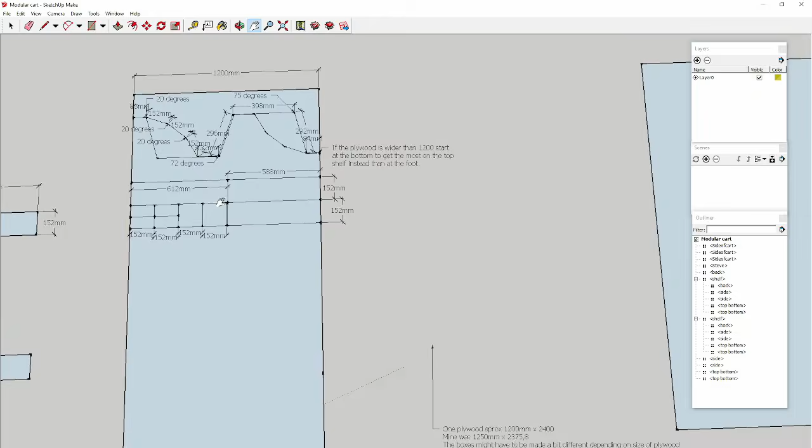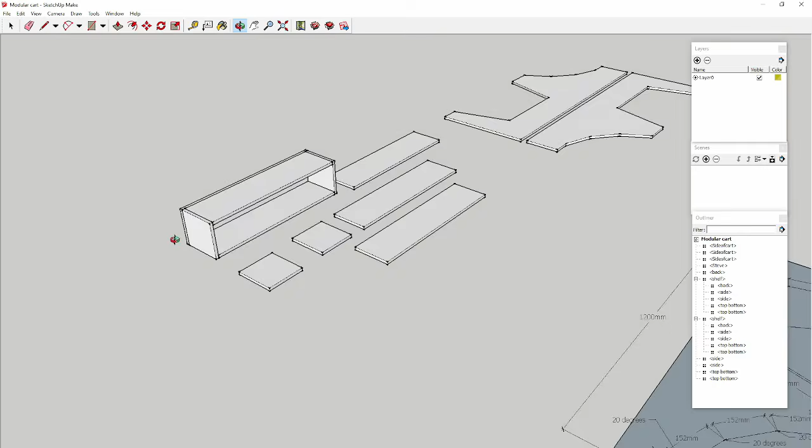So if we zoom out here, we can look at the box over here. This is what the box will look like in the end. You see that you add the top and bottom ones on the inside of the side panels, and then the back panel over all these sides. And you can either screw or nail them together.

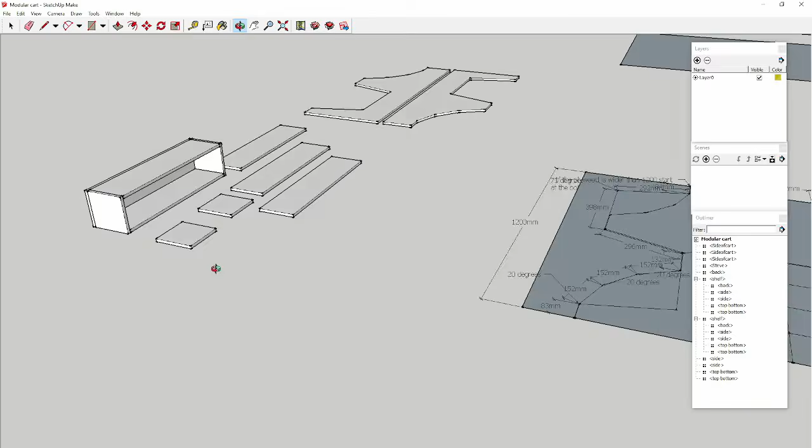I used a nail gun and glue, just these small nails just to keep it in place while the glue dried, and to give it some rigidity over time, I guess. So for each box, you will need 1 back panel, 2 top and bottom panels, and 2 side panels.

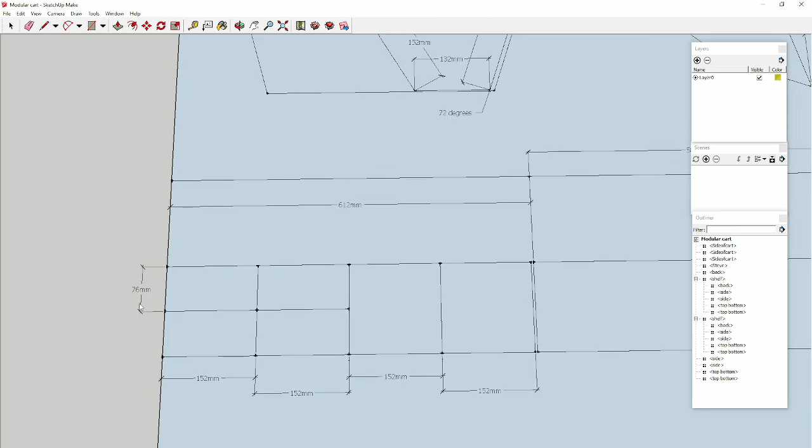And as I said, in my original design, I did the side panels 152 times 152. I'd say keep one of those to put the power supply and stuff like that in, and then maybe really bulky modules on the back, and then you can actually just split them in 2. So that would be, didn't add that, 76 millimeters wide if you want smaller panels.

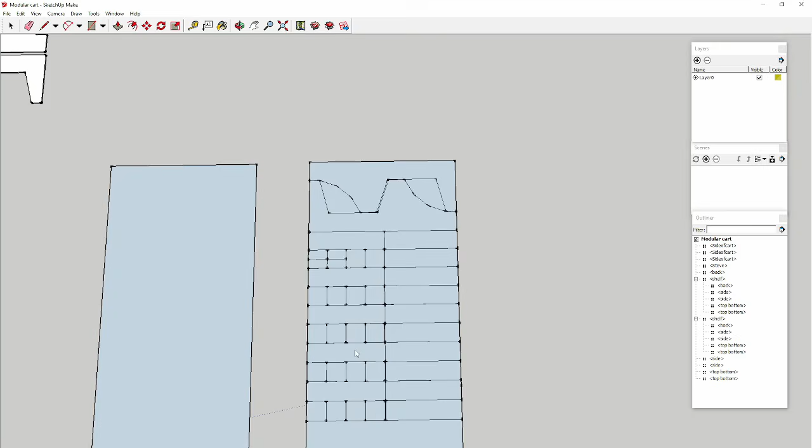And if we look at how a plywood sheet would look then, I'll come back to the sides of the cart up here, and then you would just add as many shelves as you'd like. Here you have 1, 2, 3, 4, 5 shelves, and way too many side panels, depending on if you do half size. So here you have 1, 2, 3, 4, 5, and then you wouldn't need these 3. You could actually make one more with the spare you have down here, so you could get 6 shelves if you wanted to.

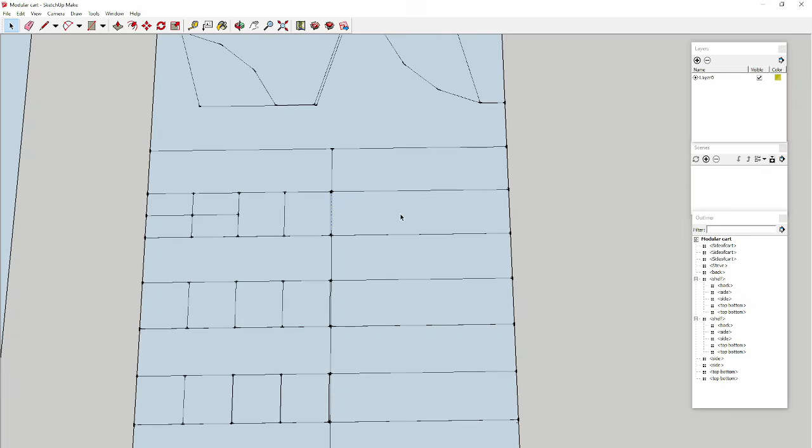Important to note that there will be one small piece of unused material in here in the middle, because it doesn't line up that way, because this one is 612 and these are 152 each. But it's all in the dimensions here. I will have a better PDF of how this looks, so you can look at that.

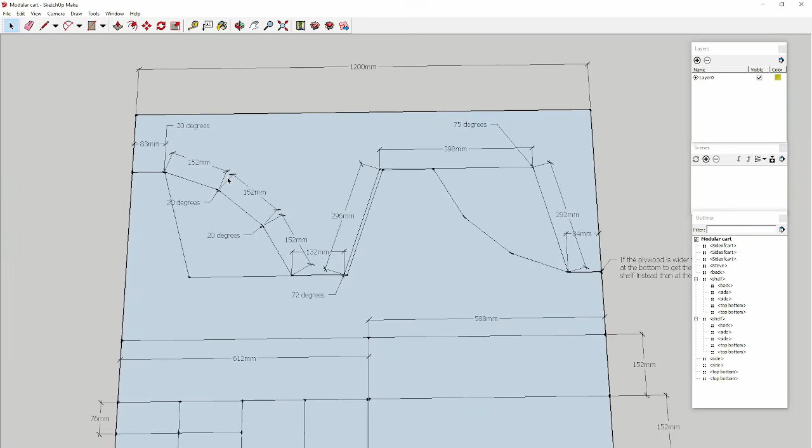So the sides of the cart are, I guess, a little bit more complicated. By placing them like this, they take the least amount of material, so you can get as many shelves as possible. The one downside that you should look out for is that one side's outside of the cart will be the back side of this board, and one will be the front side. So if you have one side that is a little bit nicer than the other one, then you might get one side that is a little bit messy.

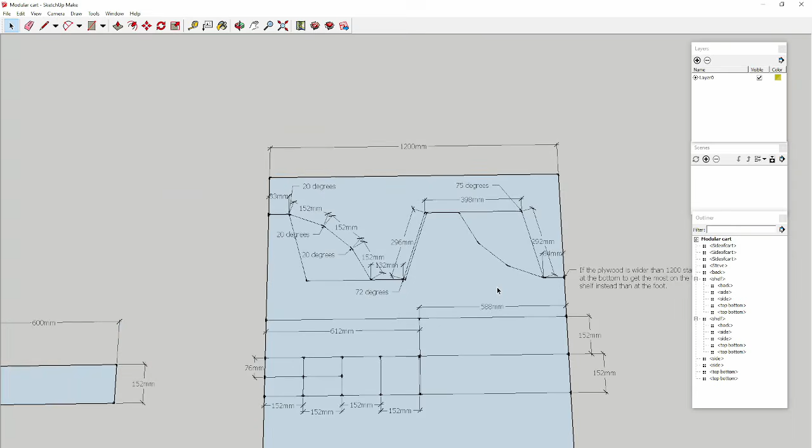So depending on the width of this board, then it's this down here. If the plywood is wider than 1200, start at the bottom to get the most on the top shelf instead of on the foot. So you take away from the foot down here, if you look at this piece here, so you get as much material as possible up here.

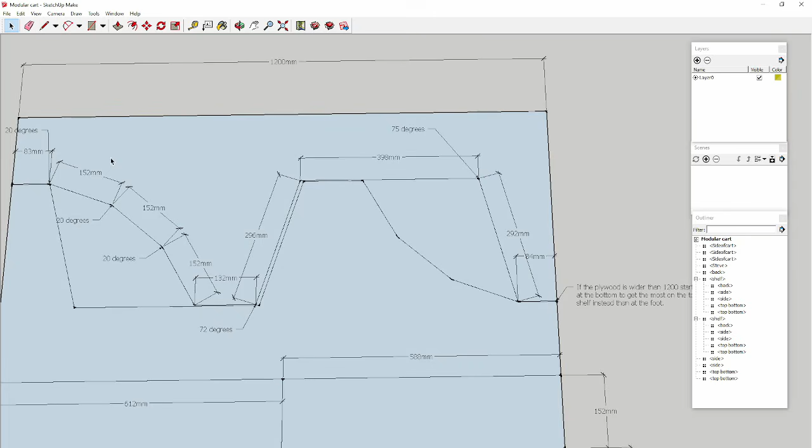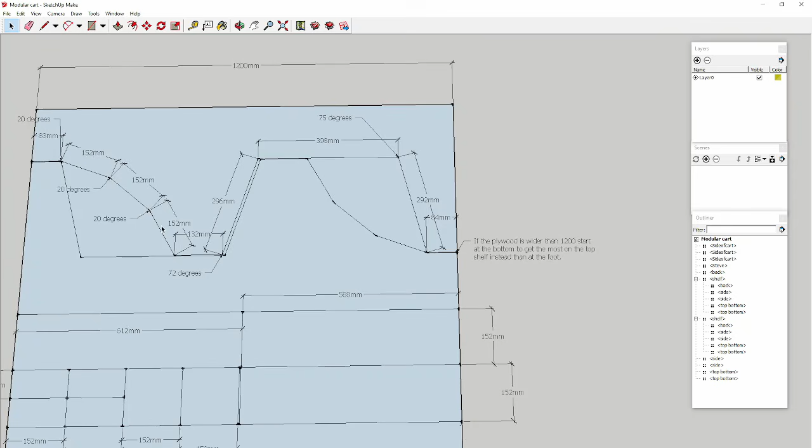But basically, you follow this along: this is 75 degrees here, it is 72 degrees there, and then you don't need to figure that one out. And then 132 millimeters here, and then it's just sections of 152 millimeters here with 20 degrees in between, and I found 20 degrees was a really nice angle to get a nice curve. And you can see how the sides of the cart will come out like this.

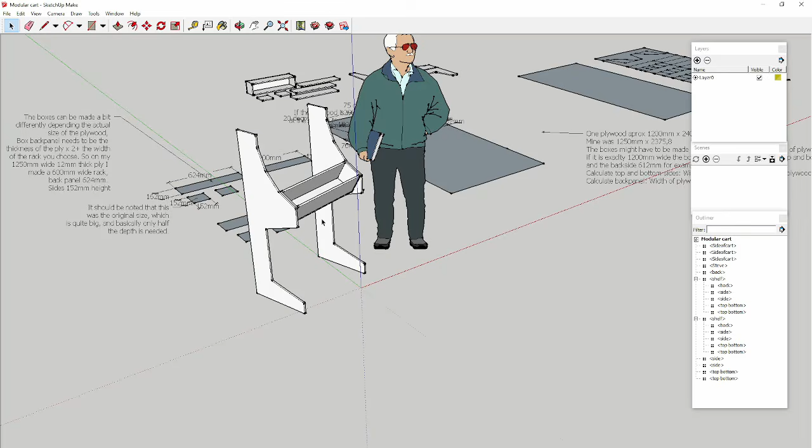And then basically, if we look down here, what you do is you make these boxes over here and you just add them in between here all the way up, and that way you get the cart. It should be said that you should use some of the scraps that you get over here or from something else to make it a bit more rigid, because it is not rigid as it is here, which I will soon show you on the cart itself.

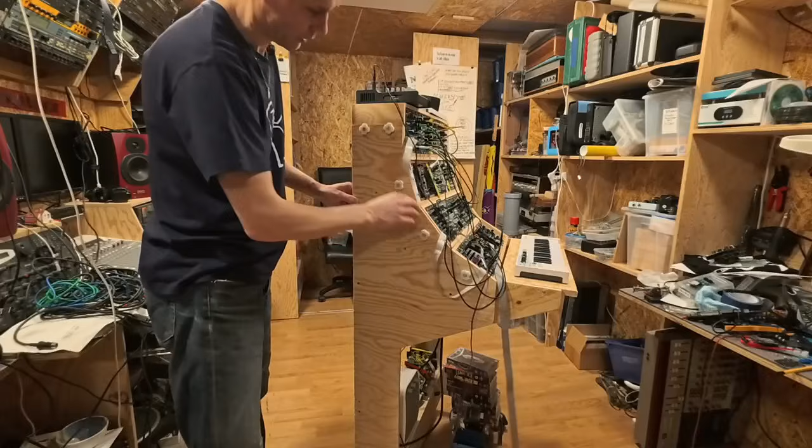So let's go back out into the real world and look at the cart again. So back at the cart, you will see that if you just cut it like the plans say, you will get this form. And then you just add the boxes like you see here. There is also a cut sheet for that. I'll put this also in the PDF file.

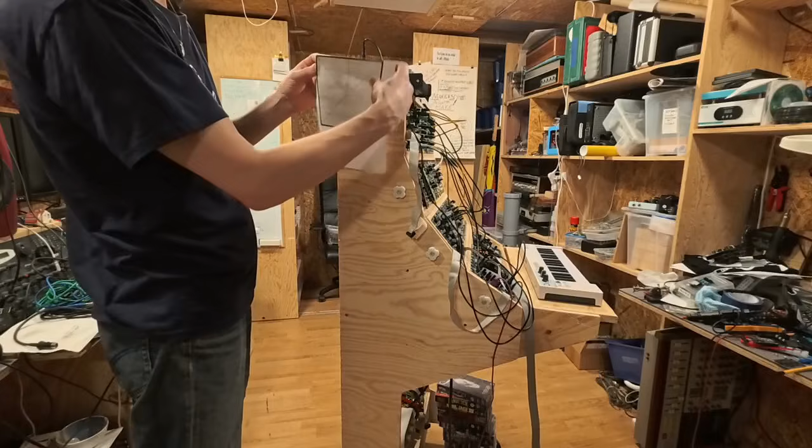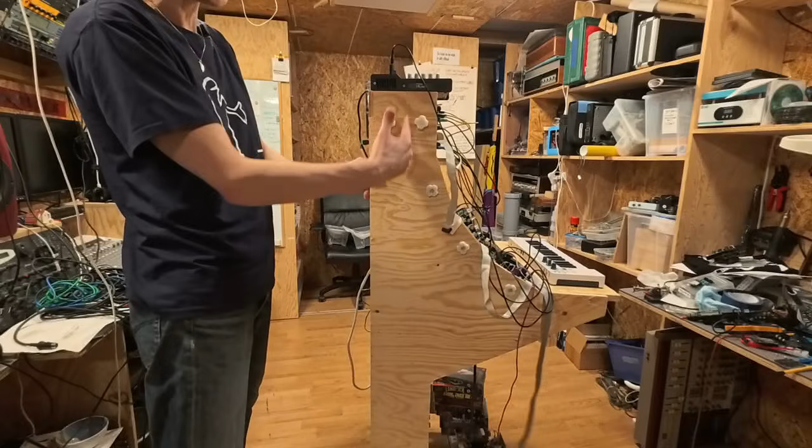So this is where you should add the holes, just place it there. Basically it's in the middle and then half the middle out. Nothing special. And if you do that, then if you choose to cut these in half, it will still be centered and still be correctly aligned to the front. So I think that worked out quite well.

A few things I've added. I like to have a keyboard to play, so I added this shelf to have that on. That is not part of the files. It could be, I guess, with that scrap piece you have at the bottom. If you make 5 shelves or whatever you make, there is material left for that.

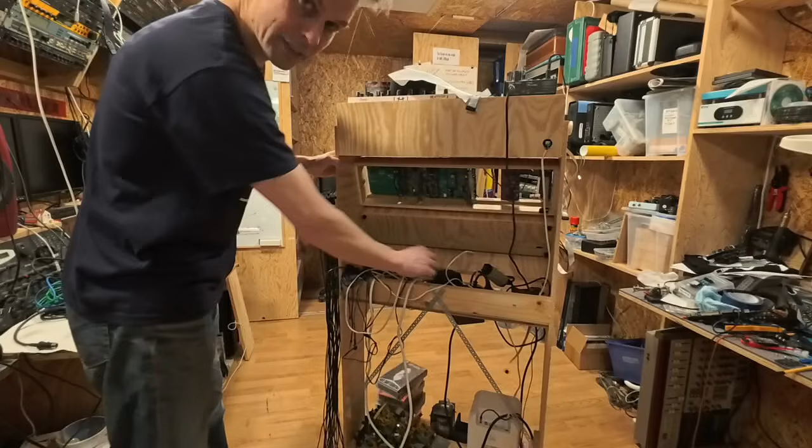On the back side, there is, as I said, one piece of a bit sturdier material. It didn't help that much. I would say if you have that piece of extra, if you don't use that, then I would just put a big plywood sheet here or a bit down to give it rigidity. What I did is, as you can see here, these metal bands is what I used, and if we remove those with a screwdriver, you will immediately see that it is way more wobbly.

So just having these 2 bands pulling it, triangulating it, I guess, makes it way more rigid than it was before. But a bigger piece of plywood would have the same effect. Also, one piece of plywood here to put all the power on, but again, it's not necessary. I just did use that.

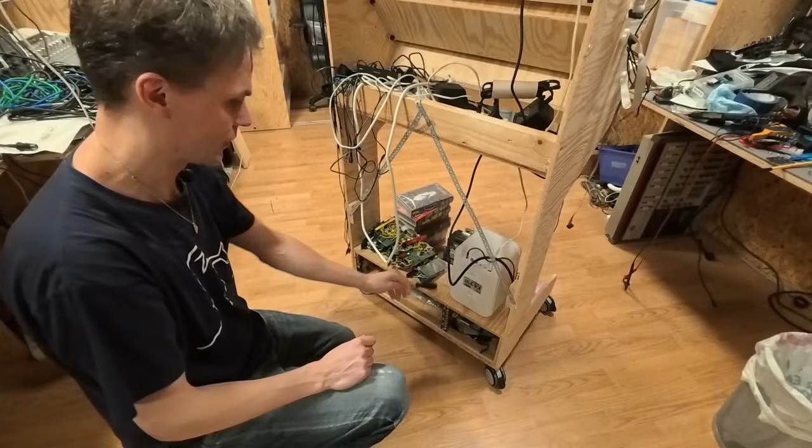And also 2 pieces of OSB down at the bottom, so I could put casters on. So just pieces of scrap down there. Again, depending on how many shelves you make, you might have leftovers on the sheet to do a bunch of these. Here's also one more box down here that I don't use, so I just placed it there.

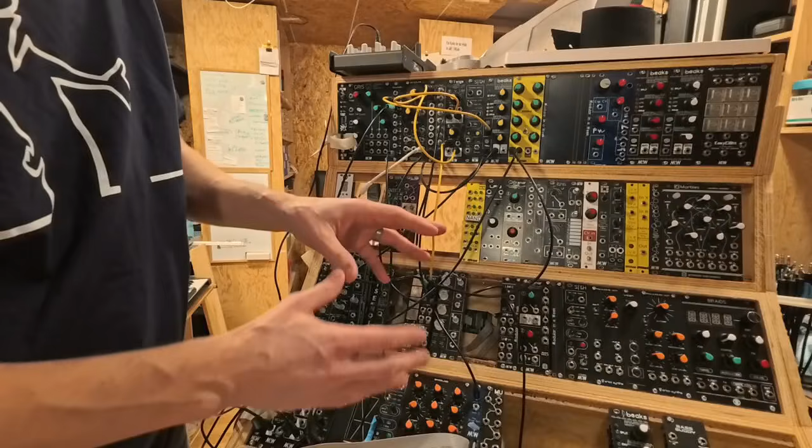One very important factor in a rack is of course the rails, and the way I've chosen to do it is just have sacrificial boards of MDF, which is just a really porous kind of board. You can buy it in smaller pieces or big pieces. I guess you could use plywood as well, but these are 8 millimeters thick, so they don't take up that much space. So they're very similar to the size of a Eurorack rail in that regard.

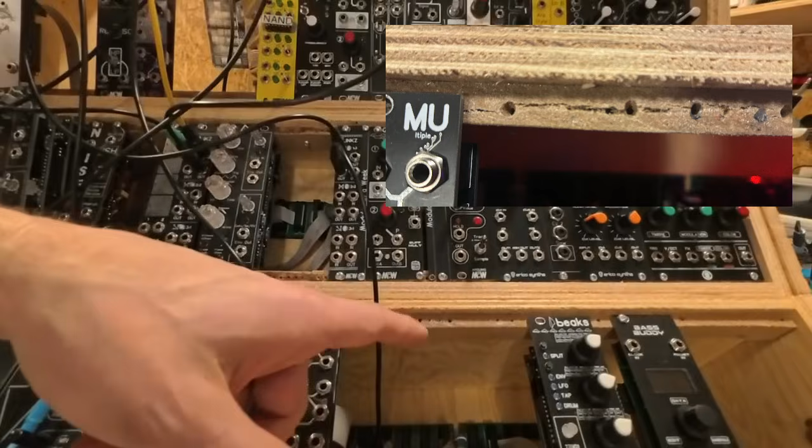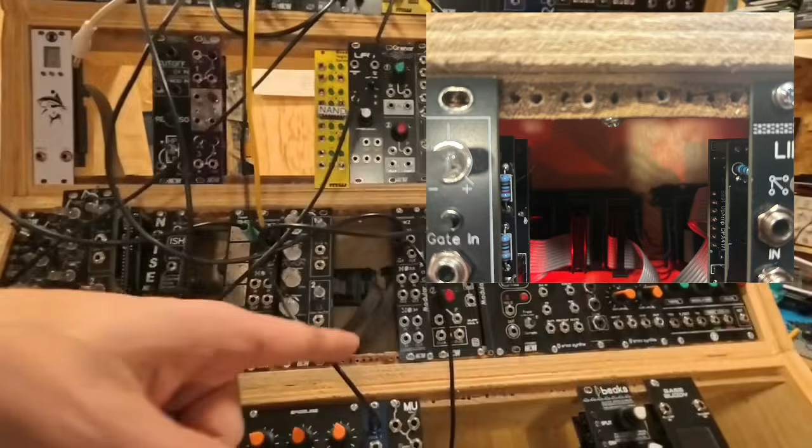One thing that is bad about it is that, let's see if we can go in here, if you just drill a screw straight into it, it will crack like this. So a couple of months ago I did a video where I just did a hole every 5 millimeters as it should be on a rail. It takes a lot of time, so I really can't recommend that, but that's one way of doing it.

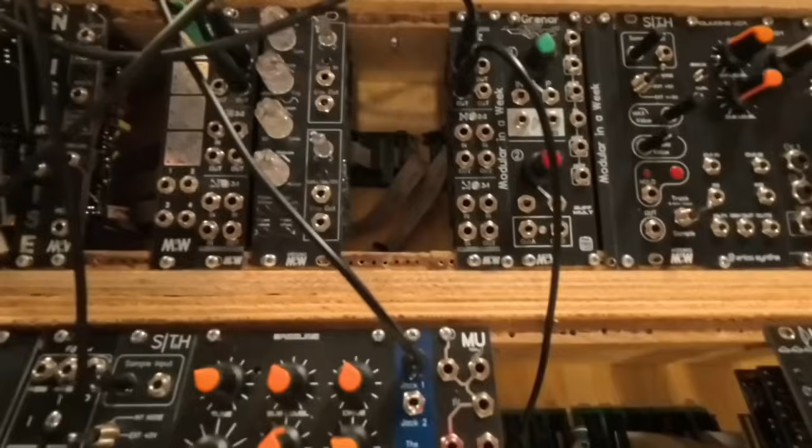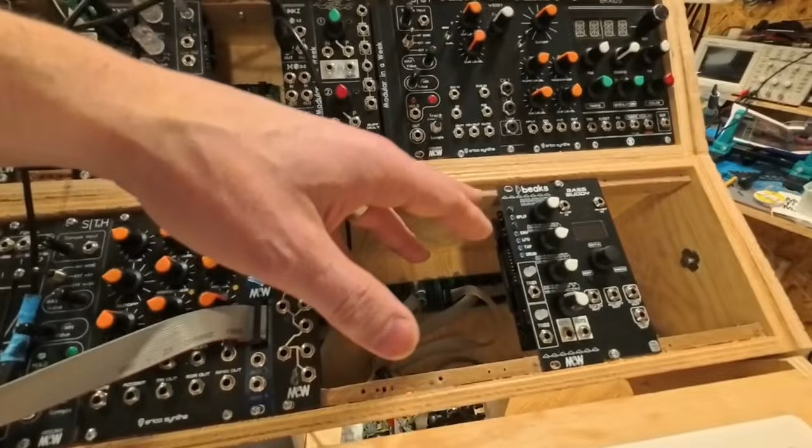Or I usually, when I want to have a module somewhere, place it out, drill a hole and just try to get as much of the sawdust away as possible. And once you have the hole, you can place it there. You can also see at some places here, I add CA glue or wood glue to make it a bit more sturdy. And this is a really good way, I think, to make a really cheap and yet simple and functional rail. It really holds things together.

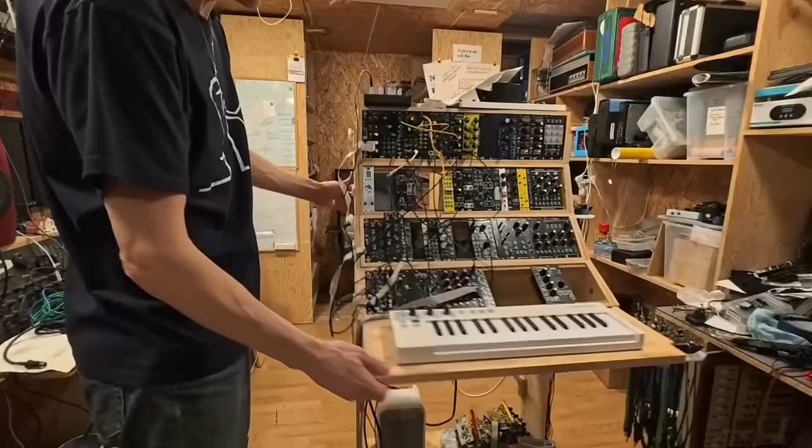Now, if you only want to use this as a modular cart in your home studio or whatever, then you are basically done here, and how you connect these together maybe doesn't matter. But in my case, I'd like to have this modular so I can take it on the road, and therefore I added screws like this, and also 3D printed a small handle.

That's of course not necessary, but with screws like this and then inserts on the inside, like here for example, those inserts that you just screw in place, and maybe a bit of glue to make them hold even better, makes it so you can take it apart and use these in another way. So if you want to go to a modular meetup and want to bring your modular, then you can't bring

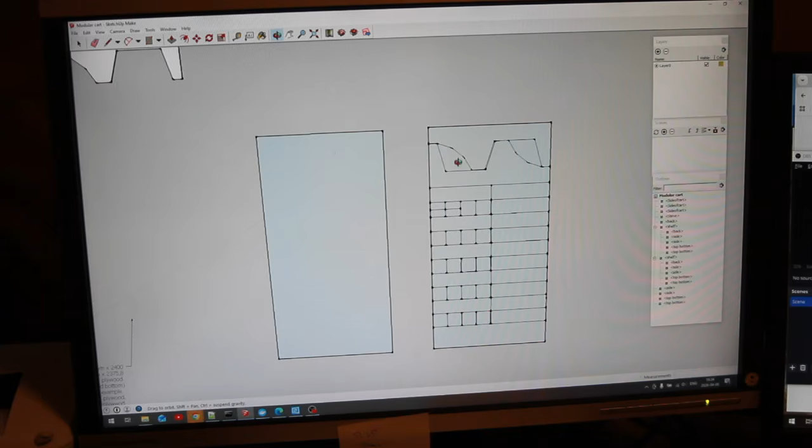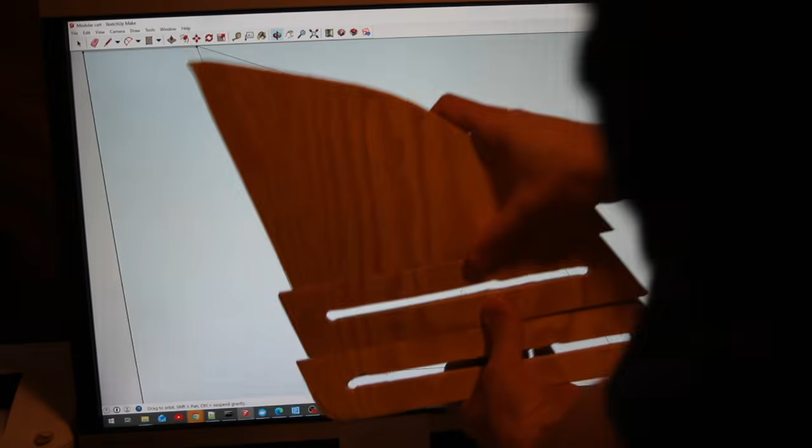the whole cart. So if you go back into the SketchUp and you look here at this area that is not used, then you get this form again, this form here, and from that you cut these two on each end, and you get 4 of these, and then you either route or cut these slots out from these. I believe they are 5 centimeters wide. No, they are not. They are 6 centimeters wide, and then the hole is about between 1 and a half centimeter.

So what you then do is you just loosen the screws, and we need to remove the cable, the power cable on the back. Now we can just take these boxes out, and if things are stuck, then it's no problem. So let me take another one out.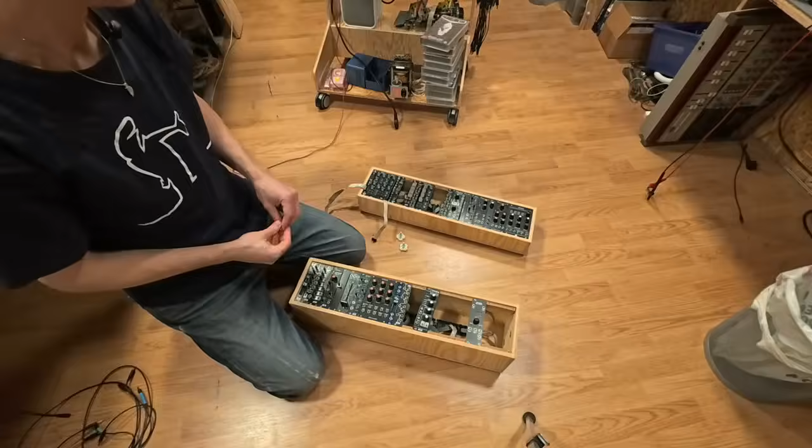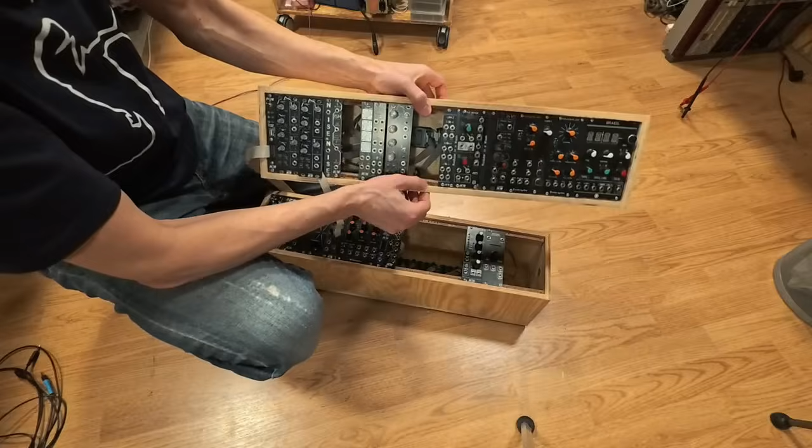When I have it like this, I can also say that how you connect the rail, you either just use a small brad gun, just for a few small nails in there, or you use screws like I think I did here, just recess them down in the MDF. It is really simple and it won't get in the way for the modules. And then you just use these small, very nice looking wood screws that just really easily screw into these pieces.

So anyway, now we've removed 2 of these, one small and one big one, and these are not stuck, so we need to have that in mind. So what you do is you take these things you have, and we take the 2 long ones, start with those, and you can instead put these in place. I like to do it like this.

So because this is just a demonstration and these are not in place, usually I would place them towards each other like this to shield them from the outside world, but because we can't carry it like that, we put it like this. And then I just bought a piece of this nylon band on AliExpress or any other of those sites, and I cut a piece of length that I thought was nice for me

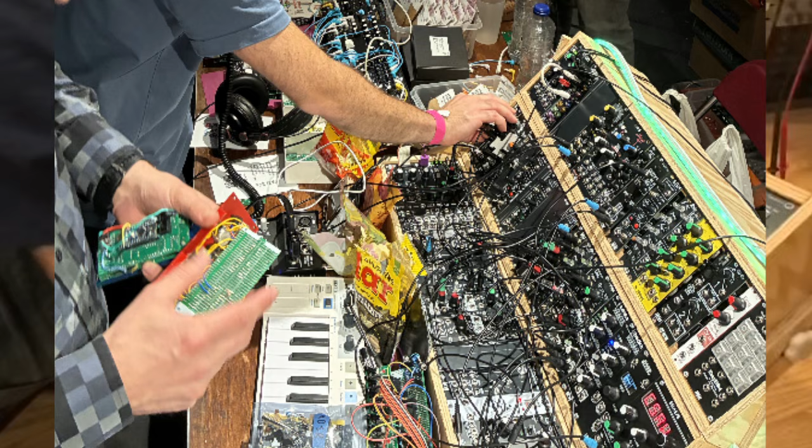I should point out that now it's starting to become quite heavy to lift even, and to carry it a long way with this. I've done it with 3 shelves. That is quite heavy after a while.

As many of you might know, one of the first things I made was a super simple power supply for my modular, where you just take a 12-volt AC adapter, plug it into the small module, which later became a bigger module, and you get plus minus 12 volts and 5 volts out to a rack.

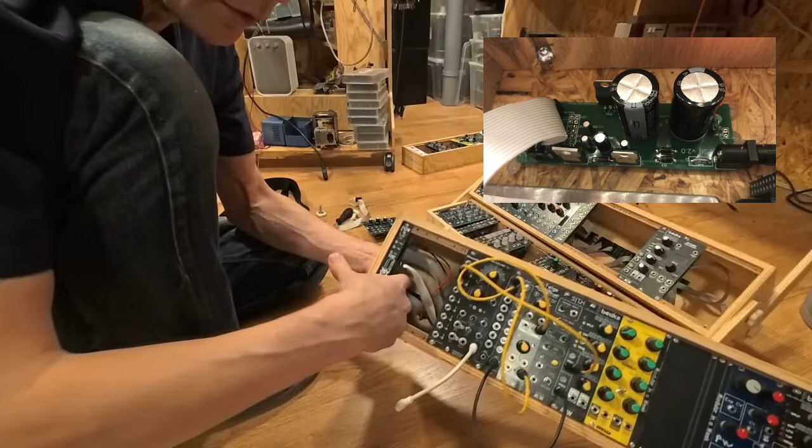And in here there is one of those sitting on the side with the power connector to the 12-volt AC adapter pointing to the back, and then I just made a big hole here, and that one is just sticking out. So you just plug the 12-volt AC in there, and then that is connected to the power supply, which is connected to the power panel,

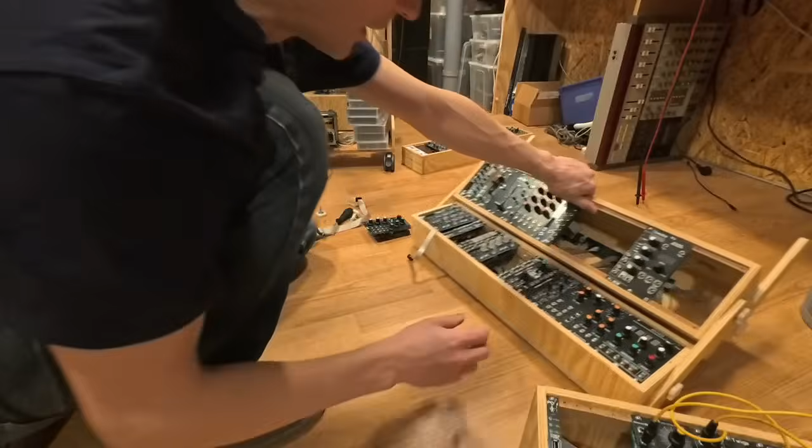where I turn it on and off, and then even more on the back you can see in here, which is also in this one, is the Eurorack power bus. So that is one way of doing this. Then I do like this.

I use the POW with one of these 16 to 16 power cables, connect that, and then I just connect it into the next one in the line, like so. And that way I get power from one power supply to two racks.

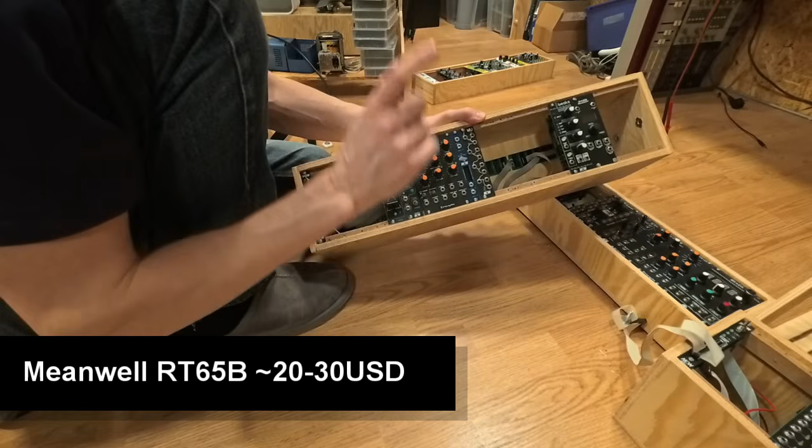However, now when we have this many modules, if we have 3 of those racks hooked up, that power supply is getting a bit weak for all those modules. So what I've done in this one is I've added a really good power supply called Meanwell RT65B, I believe. I'll put the correct name down here.

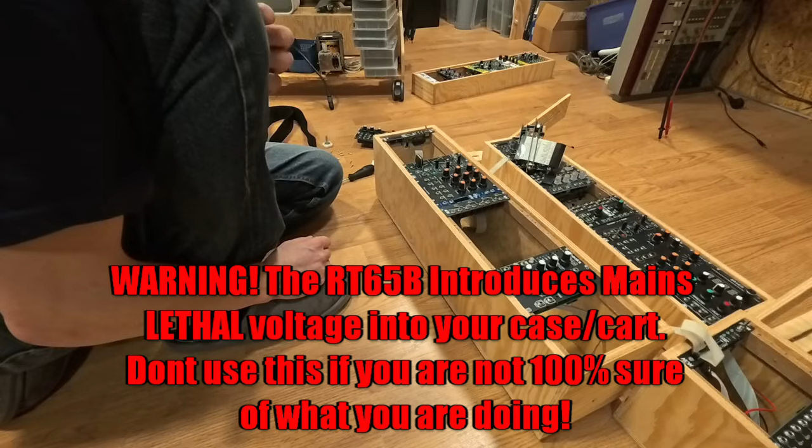That is a small module that you put mains voltage, very dangerous, into, and you get plus minus 12 volts and 5 volts out. I will never recommend this because it is lethal if you touch live wires of this.

And actually what you do in this case is you get 220 volts or 240 volts into your rack. So I bought on AliExpress these connectors that you can connect a 240 power connector in. You get an on-off switch, and then you get that on the inside.

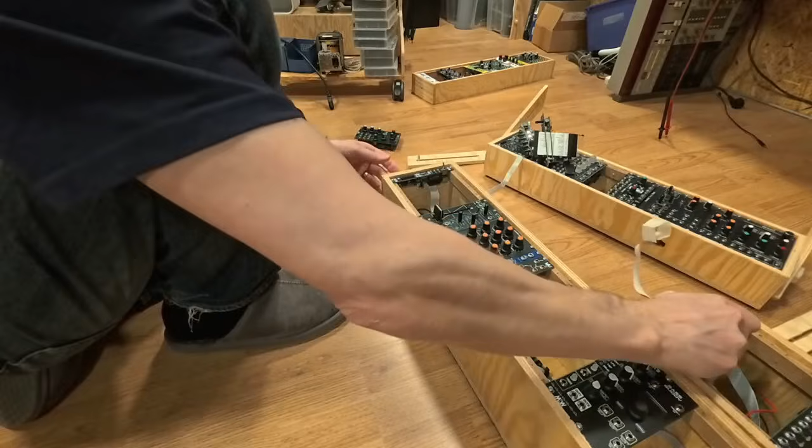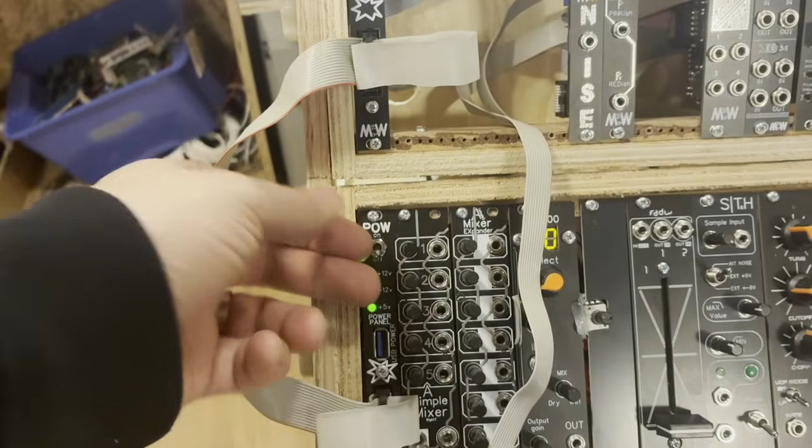And the same way, once I have 12 volts, I use the POW to get that power to another row of the rack. That only works between 2 racks though. So for that I just recently built this, or I haven't built it yet, but I ordered PCBs.

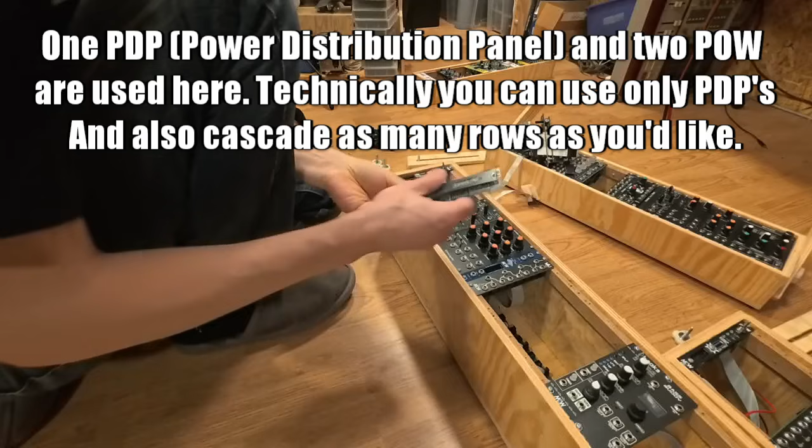So this is the PDP, the power distribution panel, which is just one of those 16 connectors on the back, and on the front there are 2. This way, by putting this one in, from this module I can cascade onto 2 different rows and use this very powerful Meanwell power supply to maybe connect all the rows together.

But again, you really need to know what you're doing if you want to have mains voltage in there, and really make sure that you isolate everything that has to do with the mains voltage, so there's no risk of you getting in there, or a screw coming loose, going in there and getting in the way of that.

So I'm just saying, there's a lot of people using the Meanwell RT65B, and it works very well most of the time. Some people do have trouble with noise from the power supply. I have not had that problem.

So that was a really thorough walkthrough of how to build this and what you can do with it, all the different configurations, both a cart and a case if you like that. So I've made PDFs of this, so you should hopefully be able to build this.